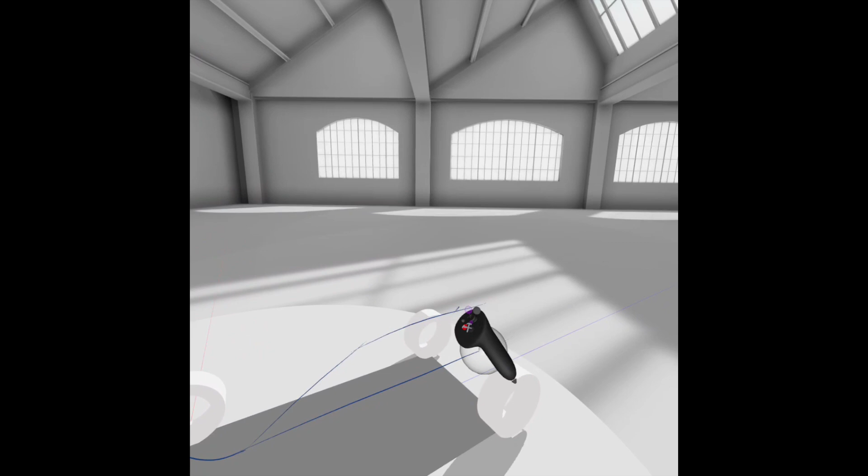I've been drawing on paper for years, and when I first got into this program, it took me about, I'll say, about 10 uses for me to really get the hang of it. We're talking on average 20 to 45 minutes a session, and I start getting the hang of it. See, I'm able to conjure up some lines fairly quickly.

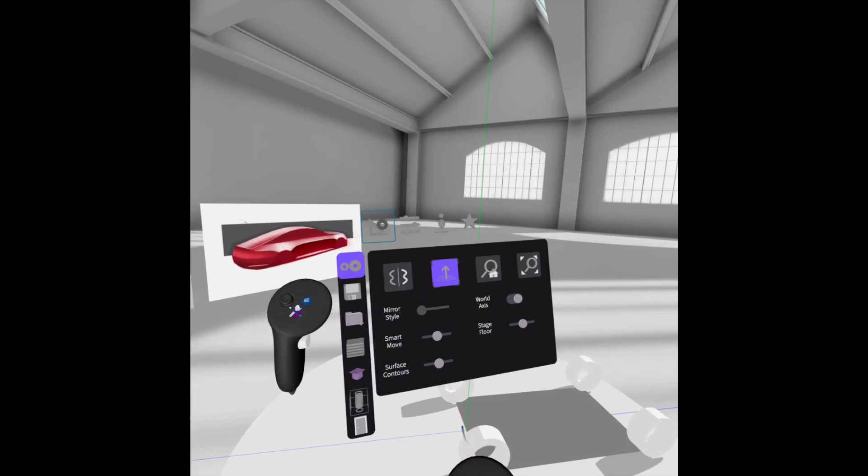So, what I'm going to do, we're going to get started with the sketching portion. You press on your left controller, press the blue menu button. It's going to come up with the settings, right? You want to make sure your mirror is on. You can choose your mirror style. Fixed is you can go beyond a mirror plane, but it'll still mirror on the other side.

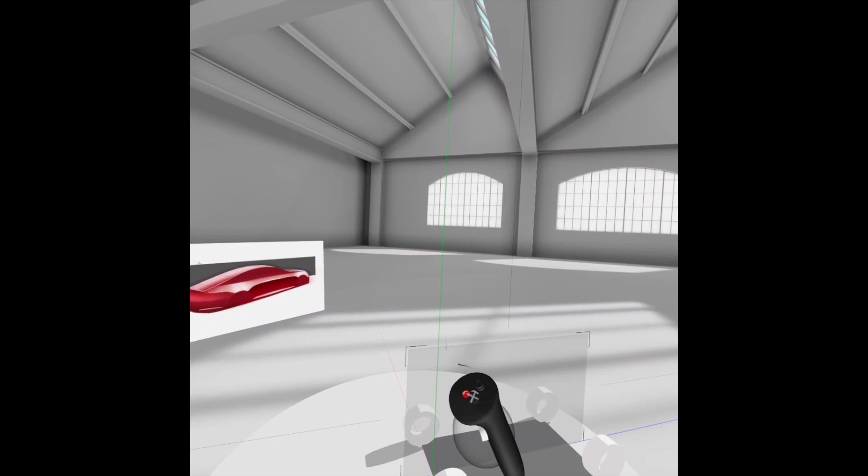With this one, it's auto scale. So however you draw the mirror, it's going to scale to wherever you're drawing your sketch lines, so it's up to you. It's a matter of preference. I'm going to turn it off because it's a little redundant. I know that the mirror is on because it's highlighted. So we'll get started with sketching out side view.

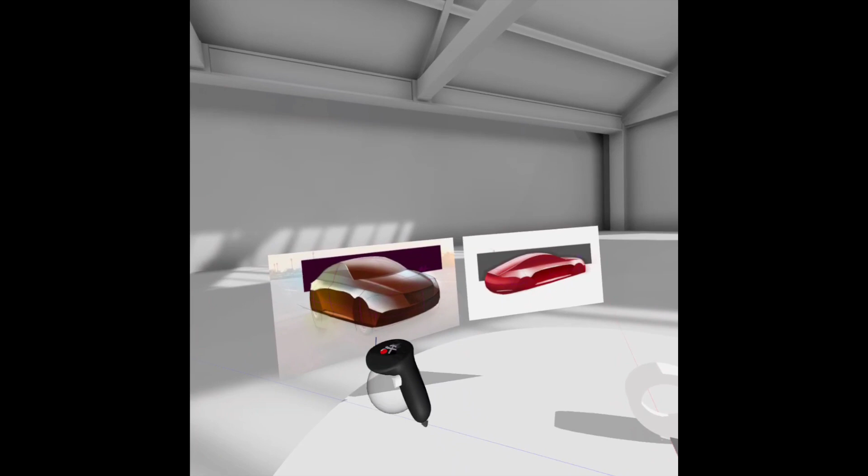Now, when I work in 3D, typically I have a side view, top view, front, rear, and a couple of drawings like this where I'm showing like the front 3/4, rear 3/4. With something like this, since it's a speed form, we can just rough everything in. We don't need plan views. We could just rough everything in, just sketch it all out. Especially since we have our chassis here, we can just sketch it all out.

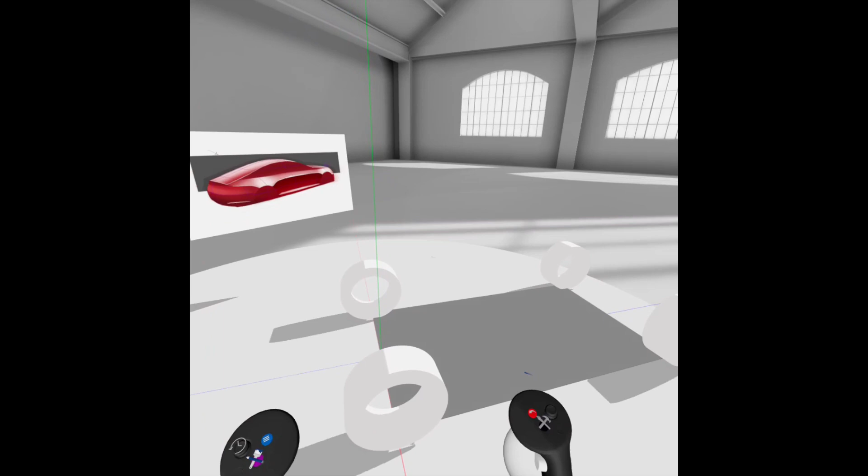Looking at the wheelbase, this will qualify for, say, four-door sedan proportions. So that's what we're going to do. All right, we'll get started. And the wheels are only here for scale and proportion sakes. So, let's see. Since it's a speed form, the actual wheels will not be included into the design itself.

So let's go to our layers and make sure that we're on a wireframe, which we are. The wireframe is going to help us set up our sub D when we start throwing in the sheet metal. So, moment. And all I'm doing, I'm just sketching with my trigger finger on the right controller, my index finger. I'm using that. You see a highlight. I'm sketching in our design space.

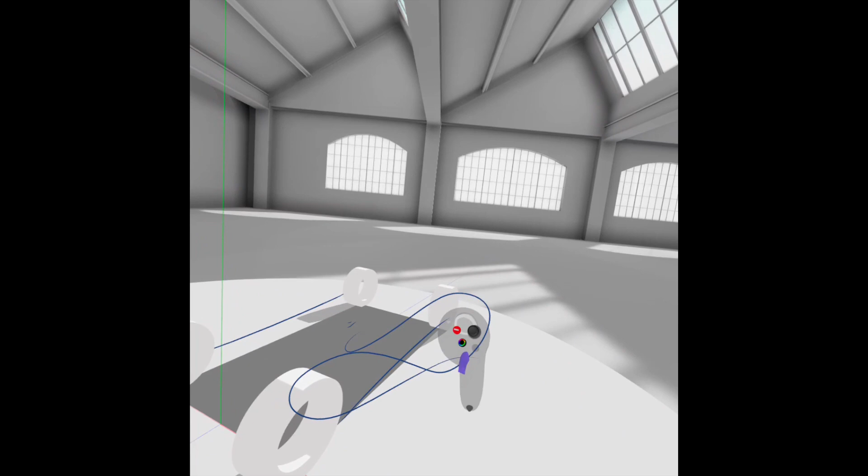And then I'm using my middle finger on its trigger. You see it's highlighted. Select the minus sign. And the minus sign only pops up when you highlight an entity, so you can delete them. And we'll keep going. I'm going to sketch this in according to the drawings I have up here. And just a reminder, these are the drawings that I did in Sketchbook Pro. So I'm just throwing some lines in.

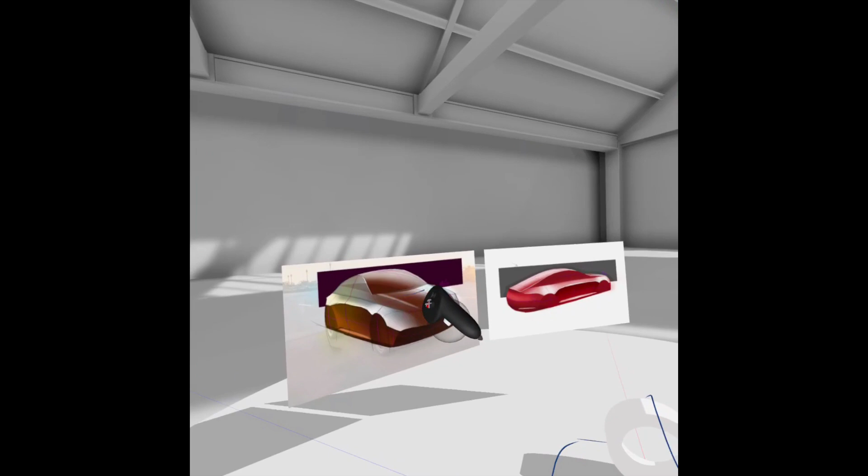Something like that. We know, looking at the design, that the windshield is going to sit behind the front wheels. So we're going to set that up. Let's see. And as far as drawing to perfection, you don't have to necessarily do it because I'll show you. There's a way to straighten up your lines and your arcs and everything after drawing everything out. So this, like I said, is just getting some things lined up.

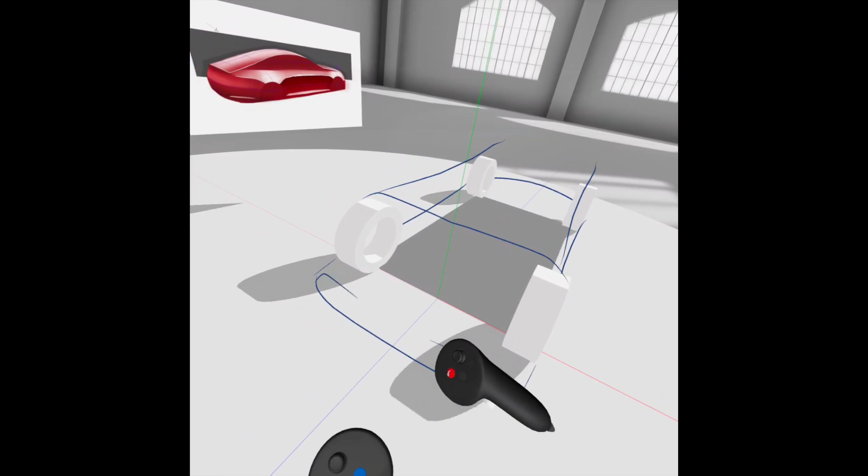Let's see. Okay, we know that is here. Okay, I'm gonna sketch everything out first, and then we'll be able to mess with the proportions with everything later. Be able to tighten everything up. Something like that. All right. It's just a placeholder for the grill.

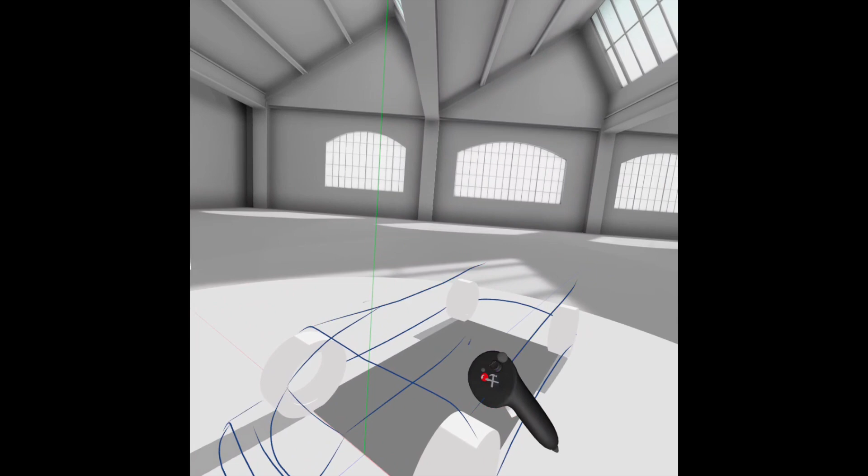Okay. This is the belt line. And then, let's see. This will be a windshield. Like I said, I'm just roughing everything in because we'll be able to straighten this out, make it look good eventually.

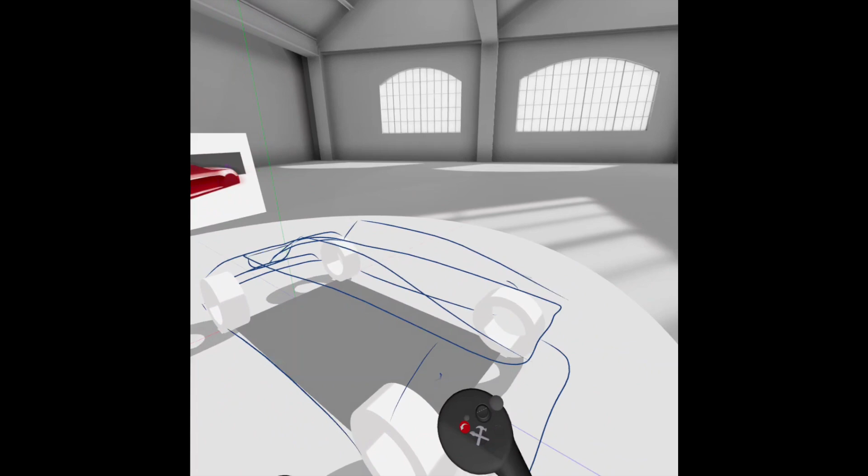Okay. All right. We got the greenhouse. Oh, let's throw in this light catcher down here. It's a light catcher. Gonna throw that in. Okay. All right. I think for the most part, we're good to go. It's a pretty basic design. It's nothing crazy.

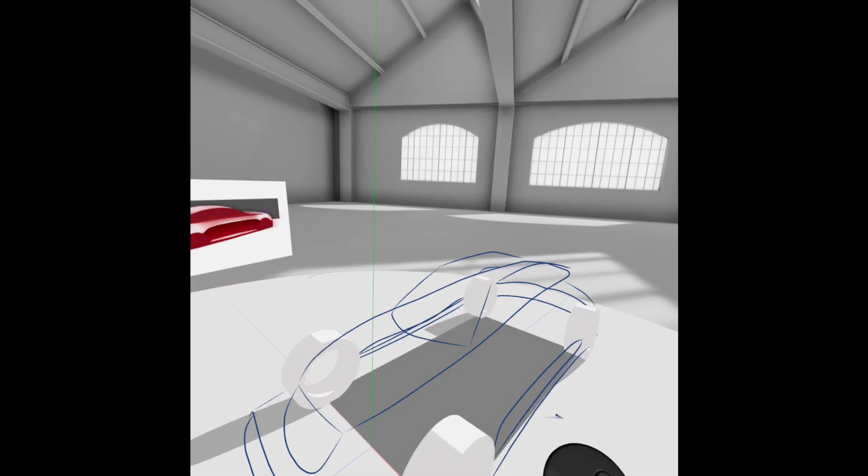As I've mentioned, the design is based on a Mercedes. It's the 2019 Mercedes CLS. So it's a four-door luxury sedan. Something you would compare to an S class. Well, I'm sorry, it's like a four-door sport back type of deal. That's why it has the backlight kind of flowing into the spoiler here.

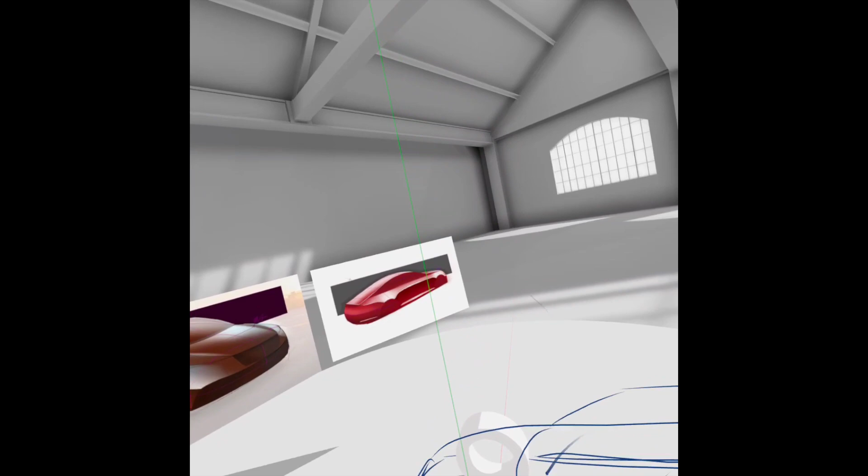So, the Audi A7 has the same thing going on for it as well. Some other notable sports sedans, large sports sedans. Let's see. Okay, so it's time to fix up these lines because, like I said, it's just roughing everything in for now. And it's a speed form, so it doesn't have to be super detailed.

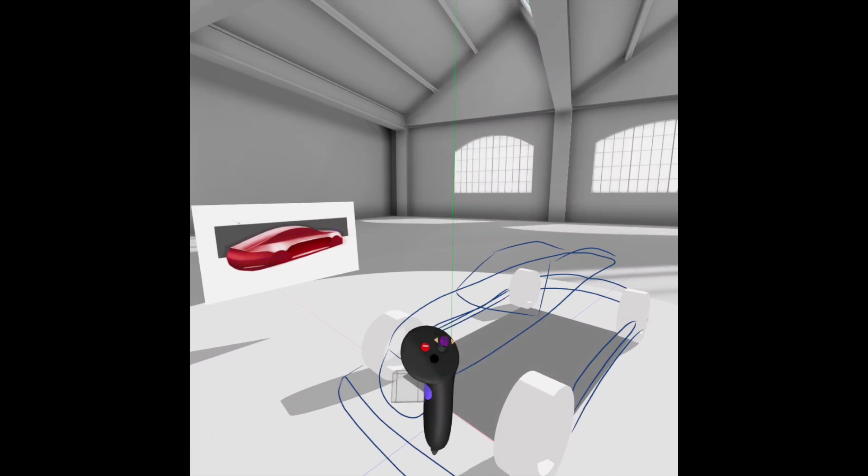What you want to do with your middle finger is, you see this little sphere, you can change the sphere too. If you hold down the trigger with your middle finger and click left and right, you'll be able to change it to a square or a cube or a sphere. We're gonna do a cube. I do prefer a cube.

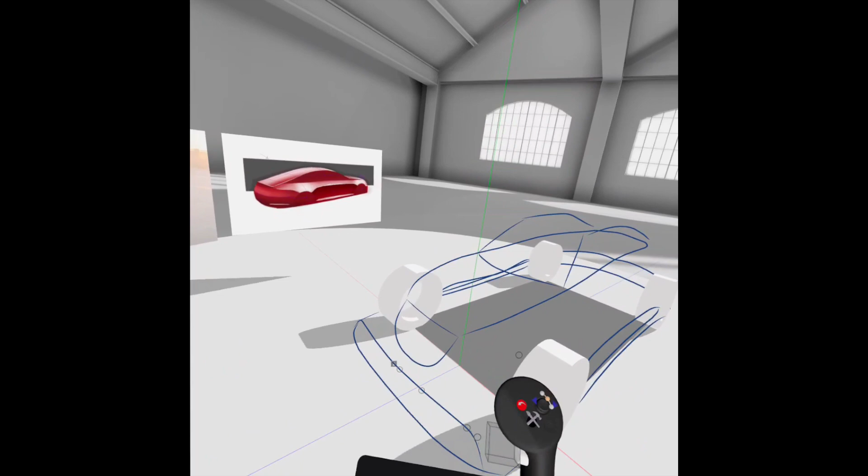So without pressing anything, hover your right controller over different line segments so you can see it highlight red. That's what you want. What you want to do is highlight the segment you want to tighten up or change, and then when you highlight it and you hold down your trigger, select on the left controller. Looks like line segments and vertices. If you select that, it's going to allow you to manipulate the line segments.

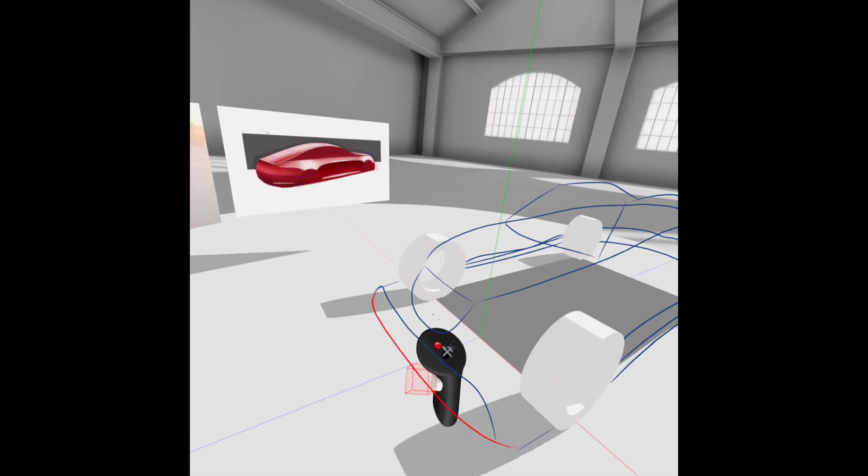You can add in vertices if you want, or you can take them out. So it's up to you. You could take them out, add them back in like that. What you want to do is make sure they're spread out evenly like that. Okay. So we're going to do this bottom line because this is going to set us up for the front end. And you just look to see what's going on up here and do accordingly.

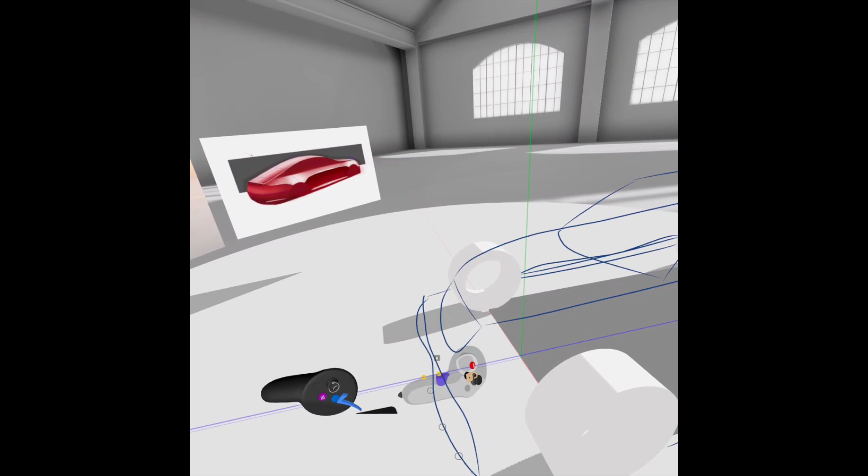Now you can manipulate each point or vertices in a specific axis too. You can free move it like this, or you can manipulate it in a specific axis. In this case, the way to do it, you want to line up your controllers like this, right? One on top of the other one in the direction you want to manipulate it. So we're going to move this left to right like that along center line.

Okay. We're going to do the same thing here. Okay. And press the little check, and then you want to do the same thing here. You see a little check mark; after you get done manipulating your lines, then you can hit the check mark on a controller. It'll lock it in. You want to do the same thing here. Okay. All right, we're going to move this grill. We're going to do the same thing. Okay.

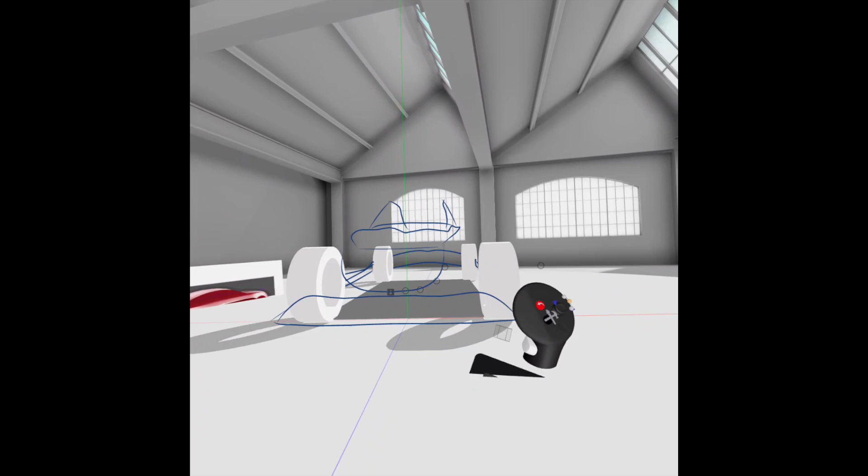All right, and then we're going to go to the front view, do the same thing. I'll fix this up a bit. Go move that out. Give it some character. It's a little boring. Okay, we're going to do the same thing here. The wireframe is going to allow us to lay the sheet metal where we want. So that's why we're doing a wireframe right now. There we go. Okay, not bad. All right, not bad, not bad. We'll make some adjustments here.

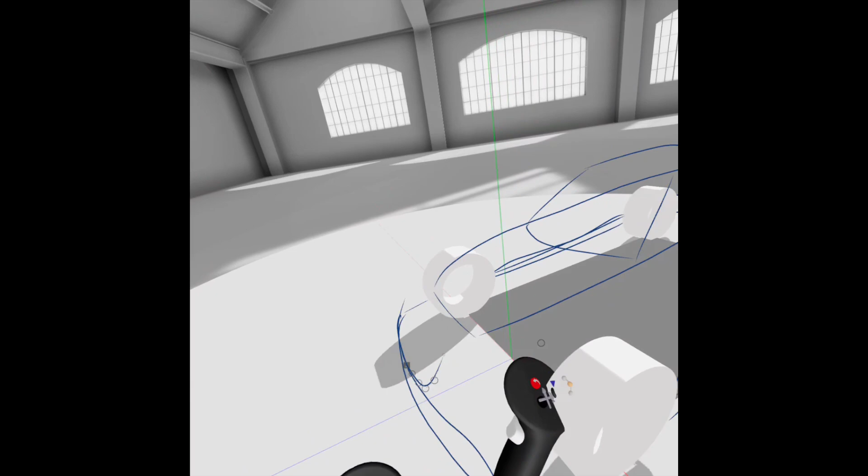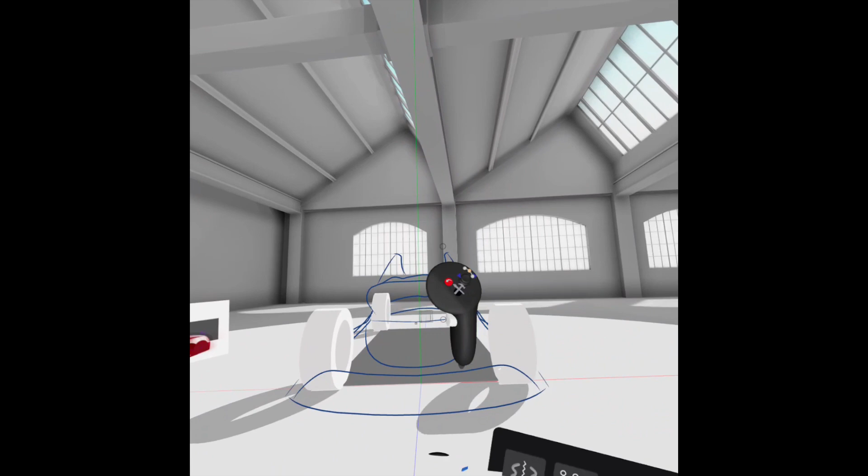The cool thing about working with a mirror plane right at center line, you can look at how the lines behave on the other side of the mirror, and that gives you some clue as to how everything is going to line up when you start laying down the sheet metal for the vehicle. You see on the other side how it looks, and you see where everything falls into place. And then same thing here. Like that. Give it some crown. There we go. Want to make sure it's doing that. Yeah, okay. All right. Same thing here.

So here's another trick. When you're doing a drawing like this, you got options, but let me go ahead and click out of this. We're going to go into our menu, and we're going to go into the settings. I keep the vertical lock on because if you don't, then you'll be able to do like this, with the middle finger trigger on your left controller.

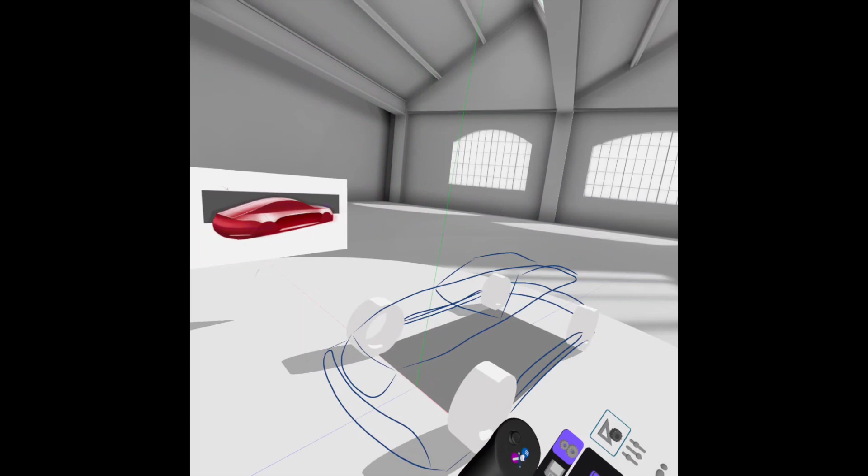This is cool and all, but honestly, for what we're doing, we're just doing a simple speed form. I like to keep it in vertical lock, so we don't have to worry about the model being all over the place. So when I go to press this trigger, wherever I move, I could just do it effortlessly in its design space. I'd rather just keep it like that. That's how I design. When you start using the program more often, you figure out what's best for you. So we're gonna go back here, start manipulating some lines.

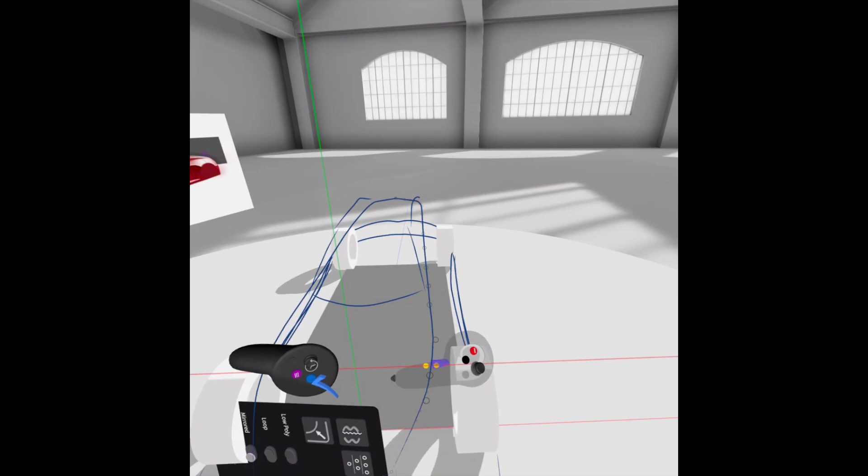I'm moving the belt line out because realistically, the belt line is not that close to center line. You still need room for occupants, even though this is a speed form. You want this to still look like a vehicle because that's what it is. This is based on a luxury sedan, so you want the proportions to make sense. And then you go into your side view and do the same thing. You try to space everything out evenly.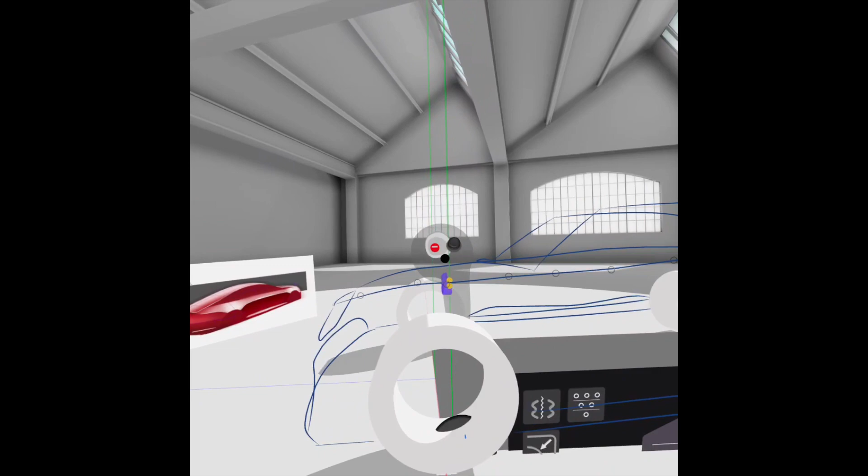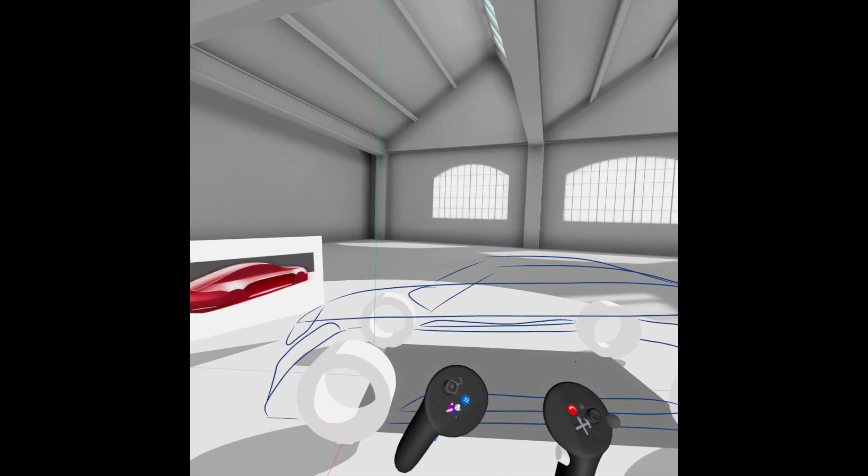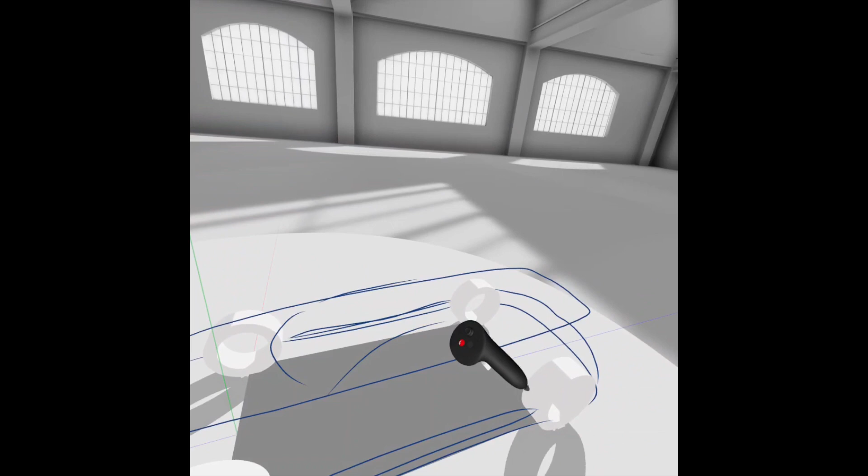So you can understand why I'm designing like this. Yeah, it just makes sense. And it helps keep things simple too. All right, here we go. Not bad. All right, then we're going to manipulate this line segment here. Let's see. Okay. I'm going to do this in one. Let's see. Okay.

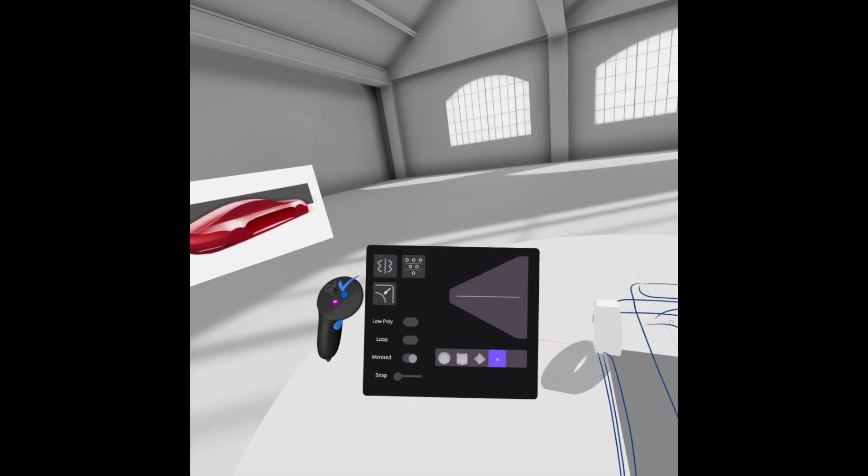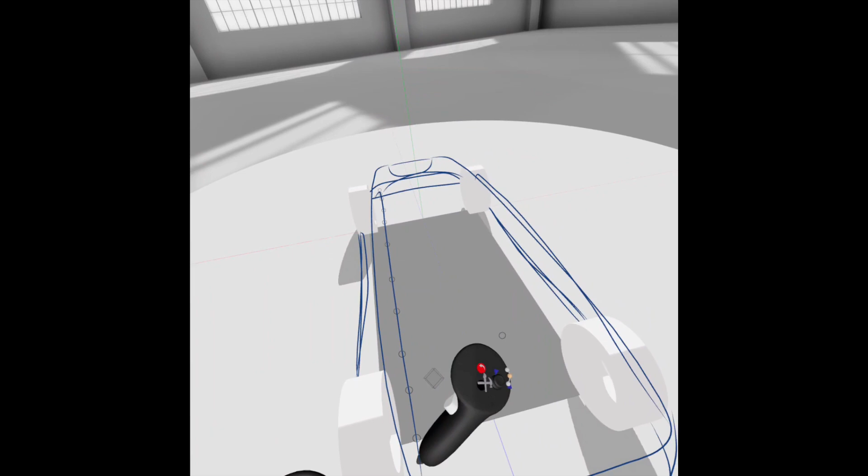So right now we're working on a greenhouse. Now, once you know some of the principles when it comes to car design, like let's say, for example, with the greenhouse, if you're looking at it from the top view, you know that you'll be able to see a bit of the side windows, right? That's the tumblehome. You'll be able to see some of the side from the top view. So naturally, let's see. We're gonna give it some more oomph. Okay, it's a little drastic, so do it like that. Go.

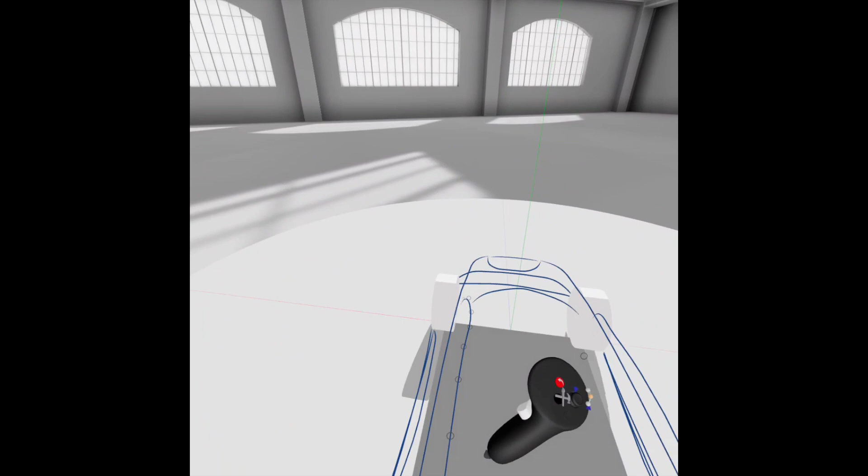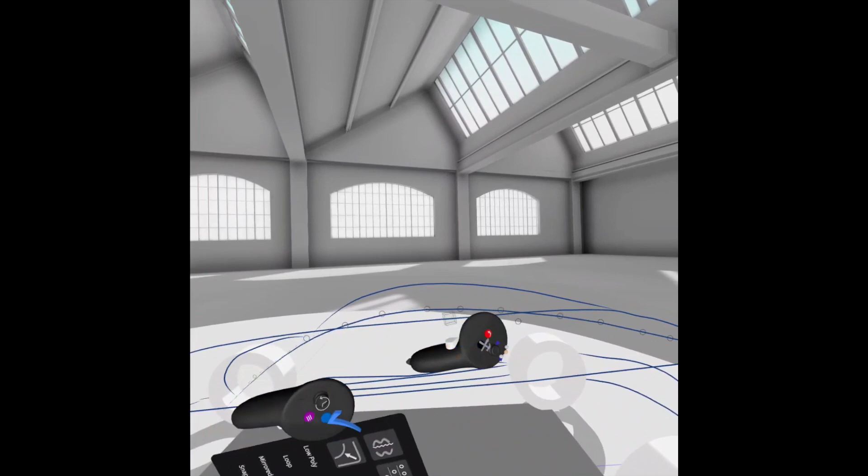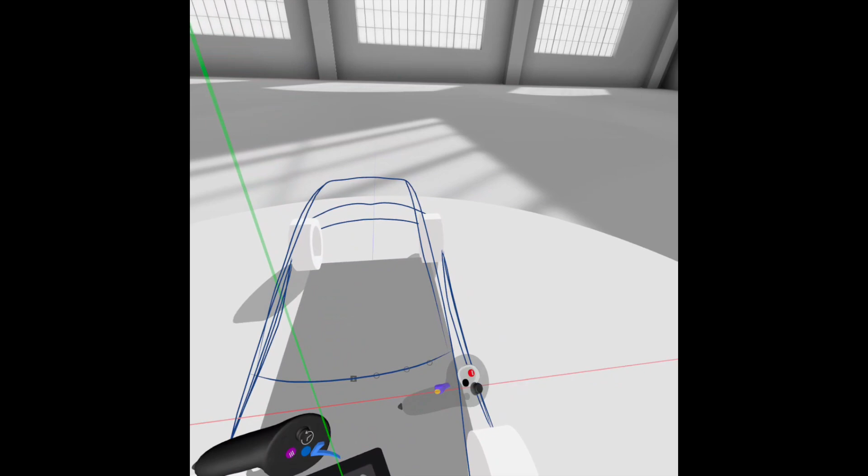Okay. I'll straighten this out a little bit. It's not bad. Like I said, it's just to get the point across. Let's see. So we're gonna fix this up here. Kind of rake it back a little bit. Okay. All right. And then this is going to be the windshield. Okay. That's not bad. Spread this out a little bit. Okay. It's going to have a little bit of crown in it. That's what we want. There we go.

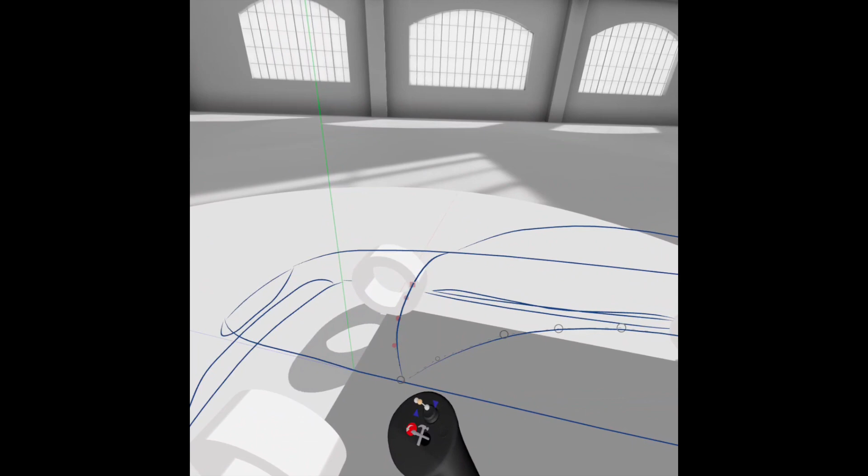Okay. Now, what I'm going to do is start connecting points. So we have the snap function. All I did was, as I showed earlier, highlighted a segment and select edit. And then it brings up this menu here. And for the snap, we're going to snap to other points. So you see when you start highlighting your segments, you'll be able to snap. So you see how I was able to snap to this segment here. And then I should be able to do the same thing here. There you go. Okay. Now I'm going to turn it off and we'll be able to line everything else up accordingly to our snap points.

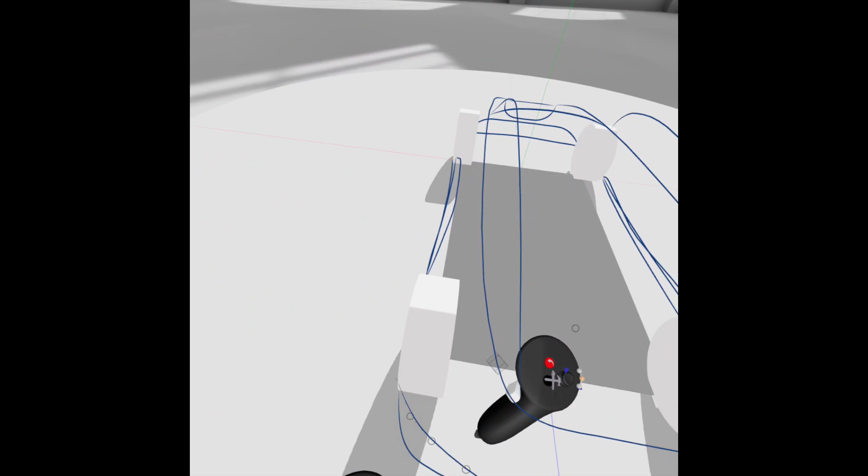So we can start straightening up our lines now. Okay. All right. We're good to go. Oh, let's straighten this up. This needs a lot of work back here. So we're going to pull this out. We're going to even this up a bit. We want to spread out our CVs or our vertices. Let's see. Like, go. Right about there. Okay.

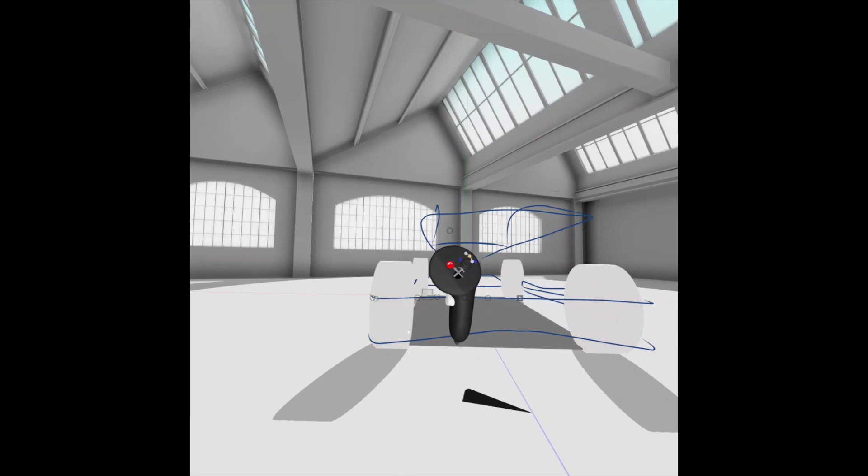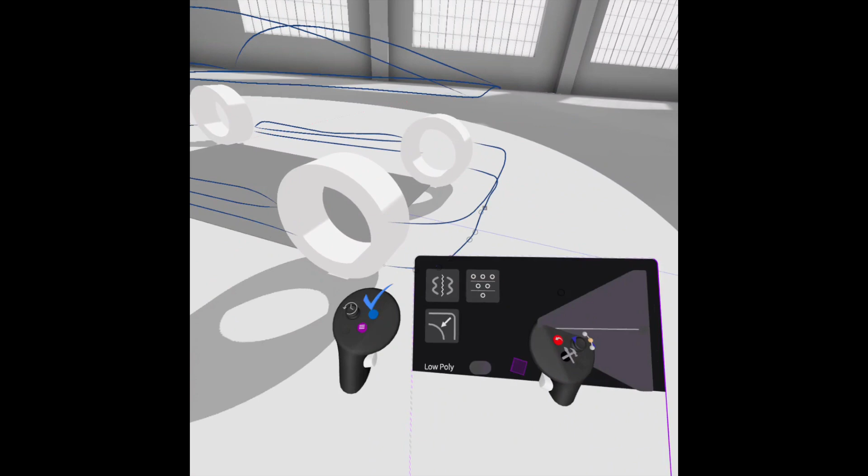It's also the reason why I'm such a fan of working in mirror mode, because you don't have to balance everything over manually. It does it for you. There we go. All right, not bad. Then we're going to do the same thing to this line segment here. There we go. We're going to turn off the snap. We don't really need it. Okay. All right, so it looks like we have this worked out for the most part. Let's see. I'll lower it.

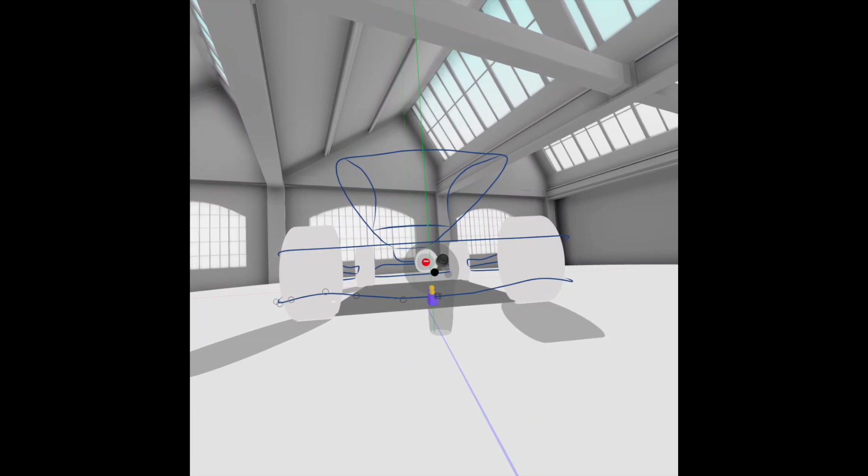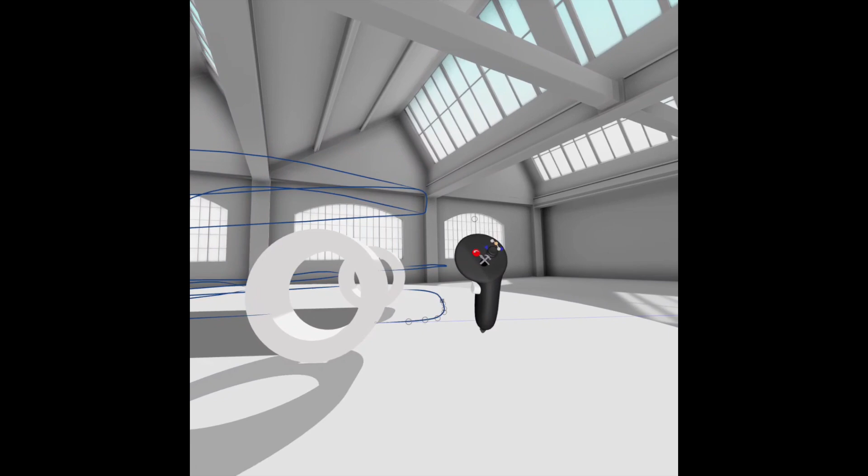And you can see where when I go to manipulate the line segments, if I'm holding my controllers like this and I go to select the vertices, you can see it highlight that it's going to move in that direction, in this case, up and down. That's going to help keep everything straight for line manipulation. You see me looking at it from this view. So just checking everything out. It's a pretty simple design. It's nothing crazy. And then, okay, good. Here, let's straighten up this line. I'm not a fan. Okay. Yeah, it's all wiggly right here. Go.

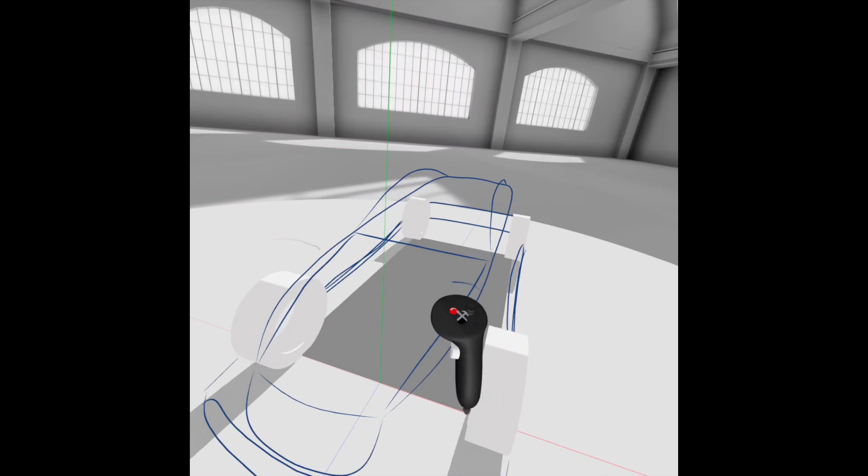All right. Now there's a crease in the hood here. We want that to be there too. So I'm gonna just go ahead and draw it in right quick. Okay. I'm gonna manipulate it. Try to spread the points out a bit.

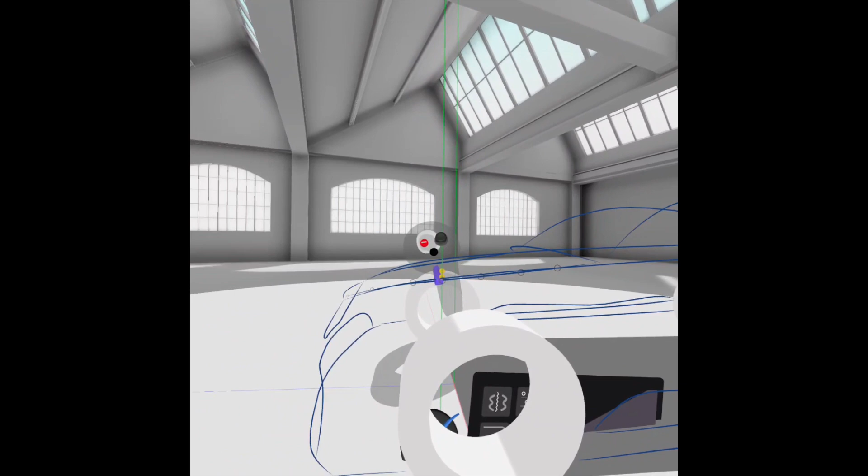Okay. And then now, if you look at this design, the way I did it, this crease falls below this line here to where it goes into the A pillar. So what we want to do is go into our side view and make sure that it falls below just a bit, just enough. There we go. Because when we go to lay out our sheet metal, we want it to demonstrate that it's kind of falling below this surface here. Okay. Same thing. Kind of tighten it up a bit. There we go. Not bad, not bad. Yep. It's not perfect, but you get the point. Okay. Very good. All right. So we got that worked out.

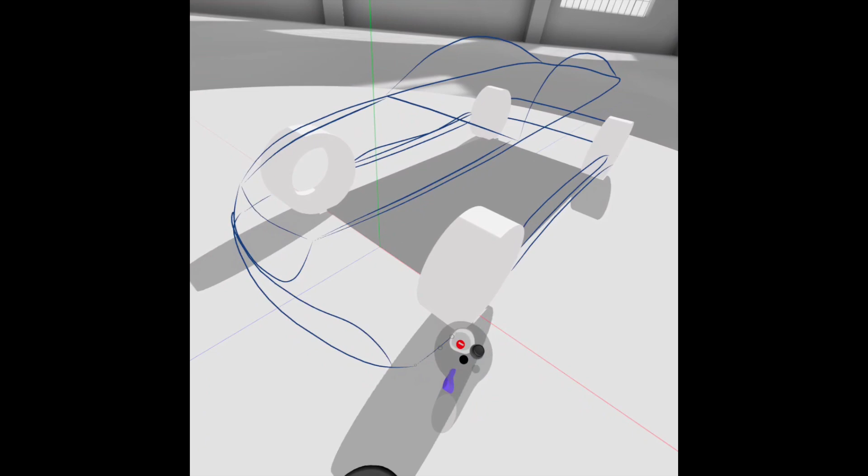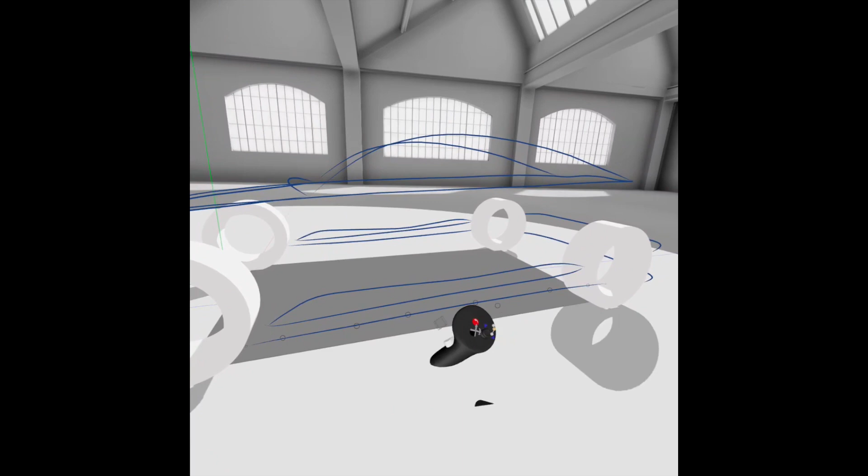Oh, let's do this too. All right. We want to snap to our points. There we go. Yep, that looks about right. Yeah, that looks good for the most part. Yep. All right, it's good to go. Okay, let's see. This area is a little tricky, but we're going to resolve it fairly soon. So let's get these lines straightened out too, so everything is nice and neat. It doesn't have to be perfect. Here, we're going to delete that line. There we go.

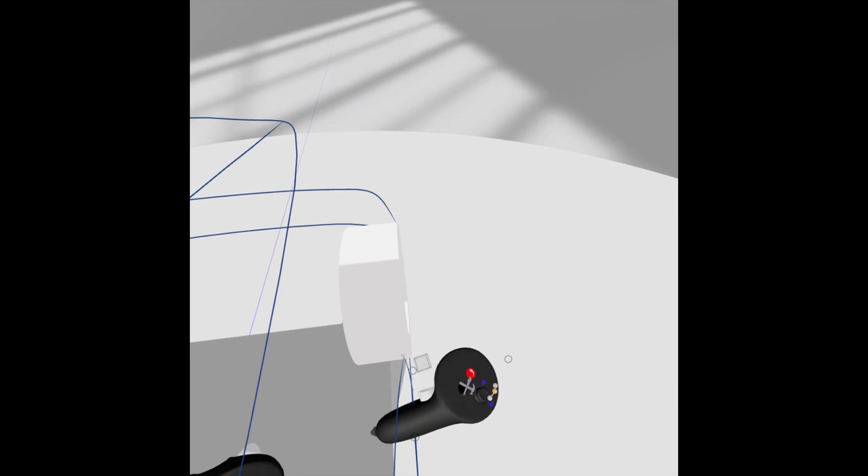All the work is going to come with the sheet metal, when we throw in our theoretical intersections and all that. Yeah. And make sure it's straight. There we go. Okay. Now we're going to flatten this out.

Okay, not bad. I think this will work. Yeah, that'll work. And then this will be our light catcher.

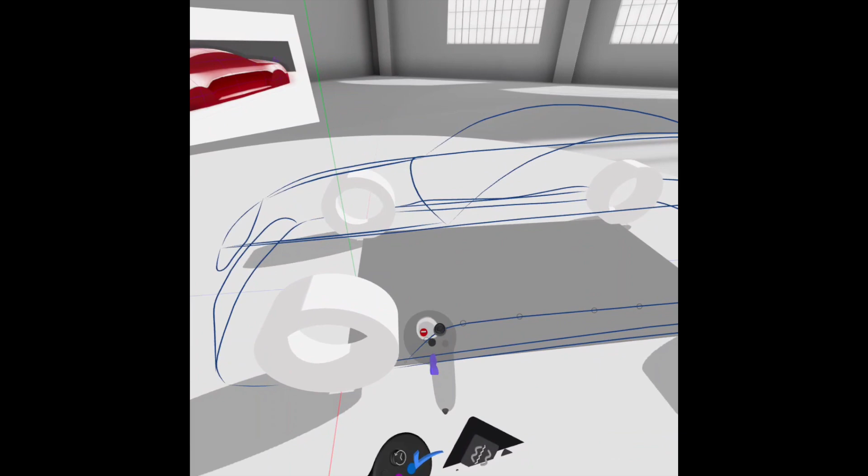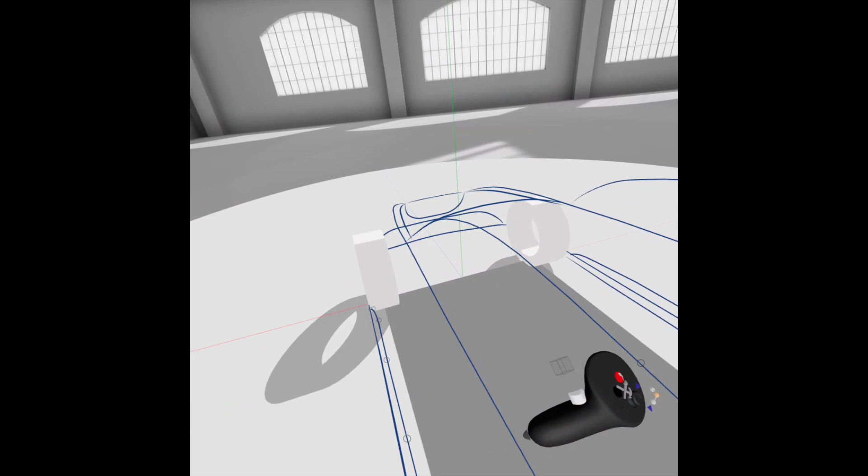Now, we don't want the light catcher to be too far into the body, because although this is a speed form, like I said previously, it's still a car. At the end of the day, we want this to be a bit realistic, with occupants sitting inside. Because of that, the light catcher can't go too far into the sheet metal, since you still have to account for occupant seating and things like that. Depending on how far inboard the occupants are, you can get away with some crazy stuff with the sheet metal, but generally you want to keep in mind there are people going to be sitting inside.

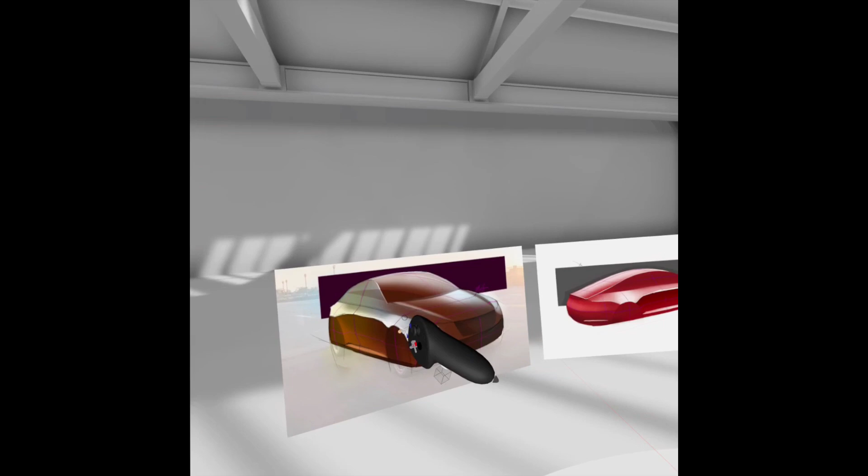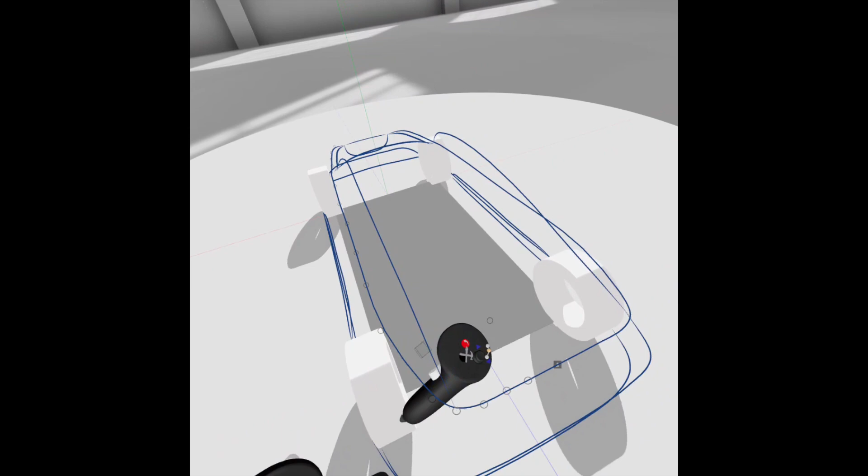With that being said, we're going to move the belt line out a bit too. We'll move that out a little bit. According to this, this will be where the wheel flat is, and then you have this transition that goes up and kind of goes over. Let me bring this out a bit. There we go, I'm just bringing out the greenhouse a bit here.

Okay, then we're going to do the same thing here. Not bad, tighten this up a little bit. There we go.

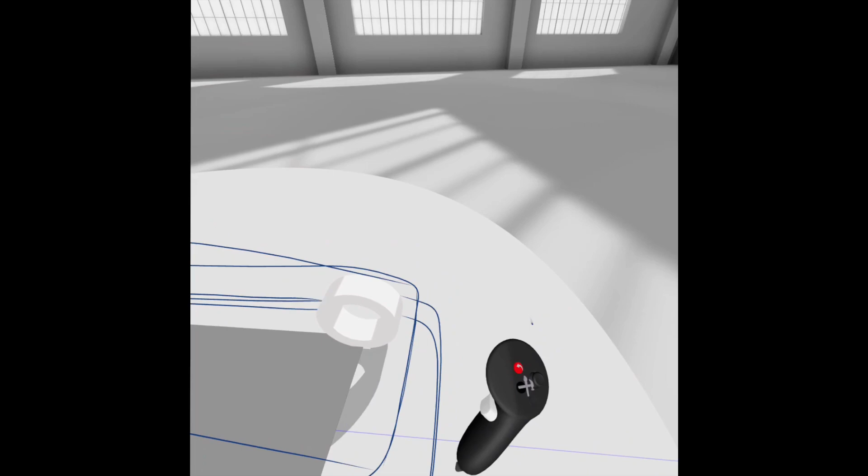Okay, all right, I think it's good to go. I think it's ready for sheet metal. We can always go back and make our changes and stuff.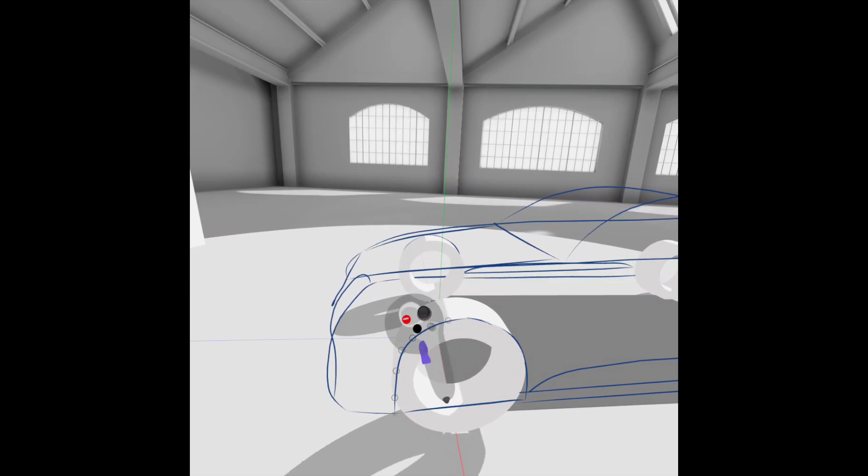Let's do our wheel flats, because technically with this speed form there aren't going to be any wheels, so we can cover this up, something like that. We're going to snap, there we go. I think that'll work. Same thing.

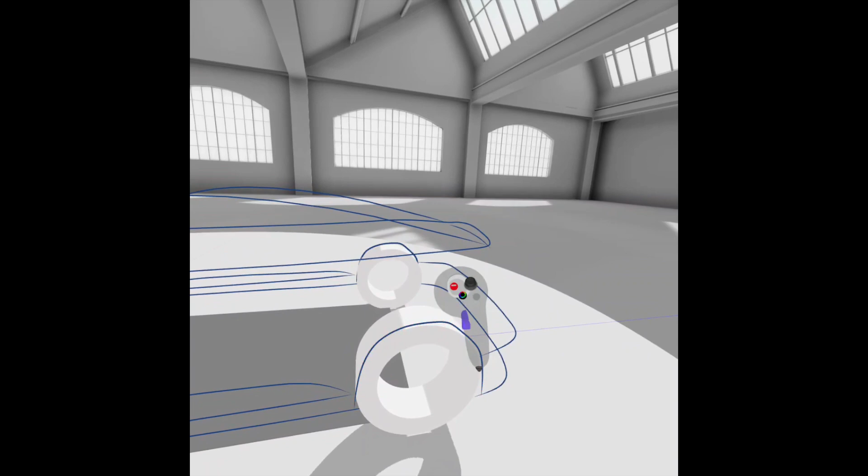All right, we're going to do the same thing back here. I'm going to try doing one segment. There we go. I'm just using the snap tool, the point snap to other objects and splines. So that's all I'm doing here, using my controller's middle finger trigger to snap these points onto this tire.

All right, think we're good to go. It's pretty much what we want. Okay, not bad. I think we can make this grill a little bit bigger.

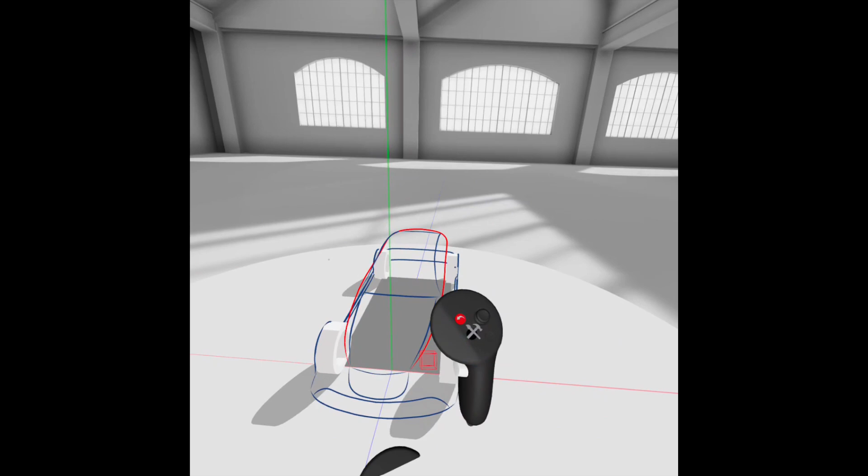So in order to do that, let's turn off the snap. I'm gonna move some of these lines out a bit, probably like there. And then I'm gonna manipulate this, kind of go out a bit.

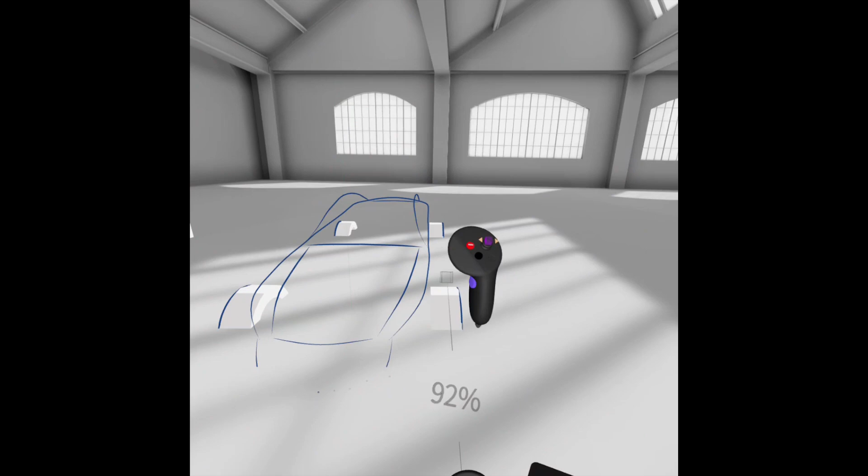All right, so to increase or decrease, or scale up or scale down the vehicle itself, you just hold this trigger, you see it highlighted. You hold the trigger, pull apart, push together, that's all you do. Scale up like that, so you get a sense of how big this car is, and you can see things a little bit better too.

Okay, good, we want to stretch this one out here. All right, not bad. There we go, okay, that's what we want. Then we're going to move this in.

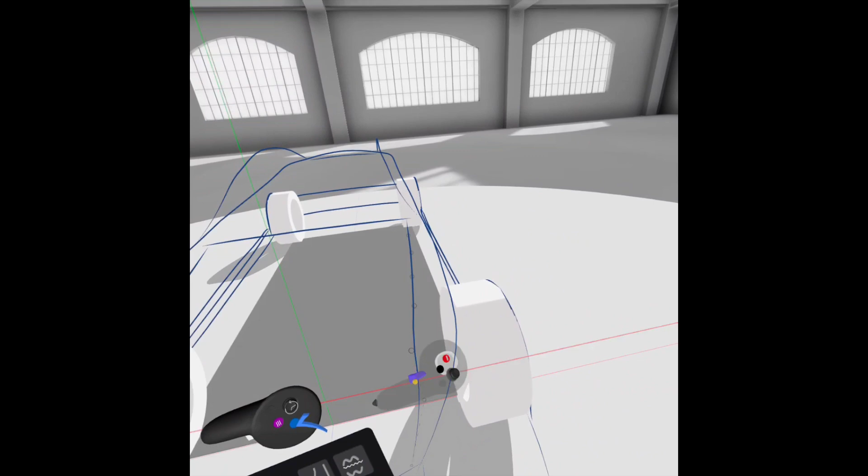This is that crease in the hood that falls below the belt line. It's a simple aesthetic added to the hood or the bonnet, depending on where you are. It adds a little bit of character to the hood, and you'll see what I mean once we start laying the sheet metal down.

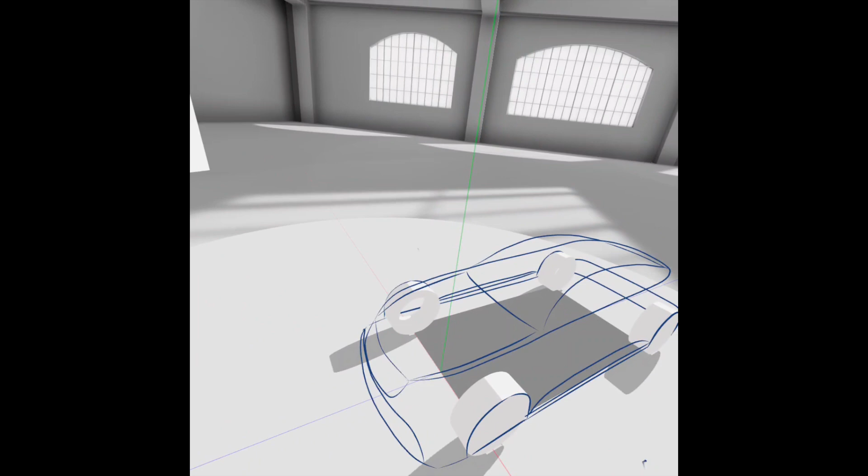Okay, all right, that's pretty good, that's what we want. Let me tighten this up a little bit down here too. Then we want to tighten this up.

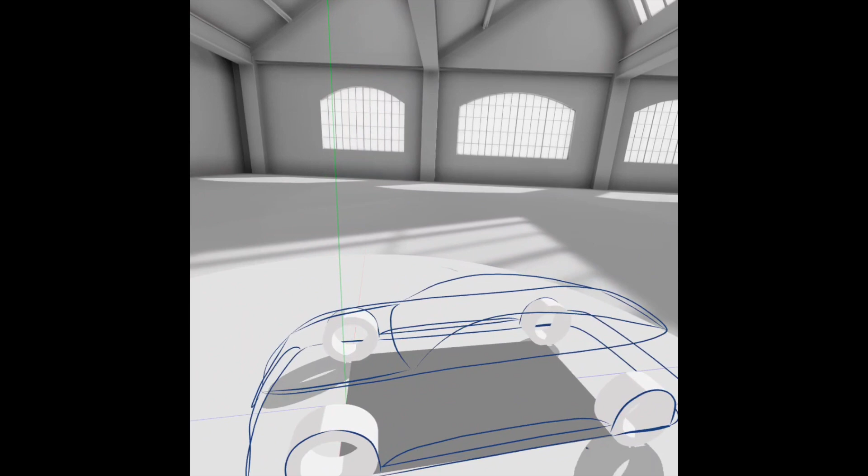All right, I think we're good to go. All right, so we can start laying down some sheet metal. This is the wireframe for our vehicle. All right, yep, I think we're good to go. Okay, very good.

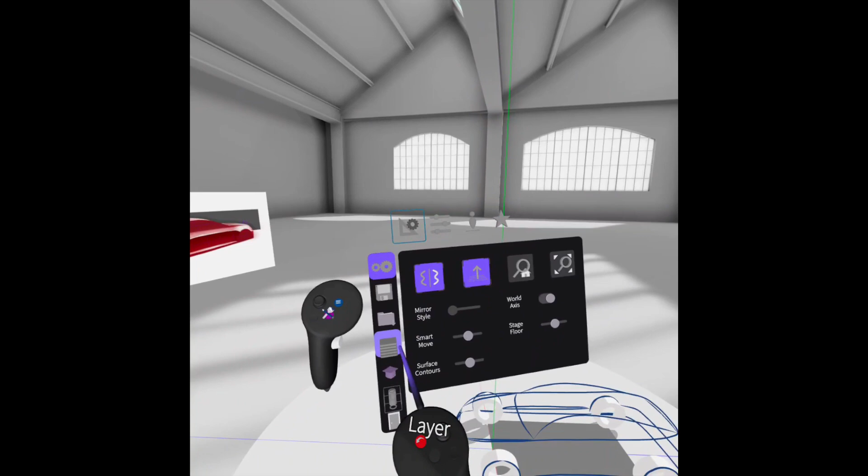Now, what we're going to do is eliminate the chassis, the prefab chassis. We're just going to make the layer invisible. There it is. All right, so now we just have a wireframe that is visible and we're able to manipulate. So in this next part, we're going to start laying down the sheet metal, and I'm going to show you all how to do that.

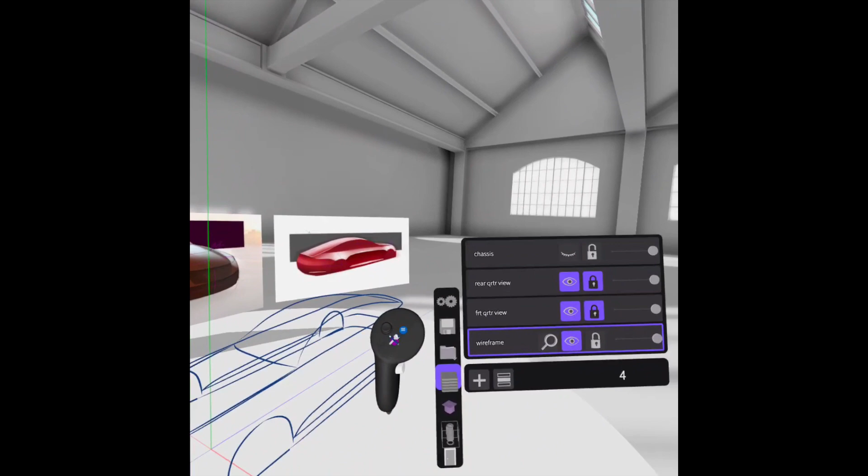Here, let's take some pictures. So press the blue menu button on your left controller, go up to save and export. Of course you want to save it, but there's an option to take screenshots, you'll see a little camera pop up. But I'm going to save this first. I'm saving it to my landing pad so I'll be able to access it from wherever. Then I'm gonna save it to device, we'll just say yes. Okay, I'm gonna switch it back to landing pad.

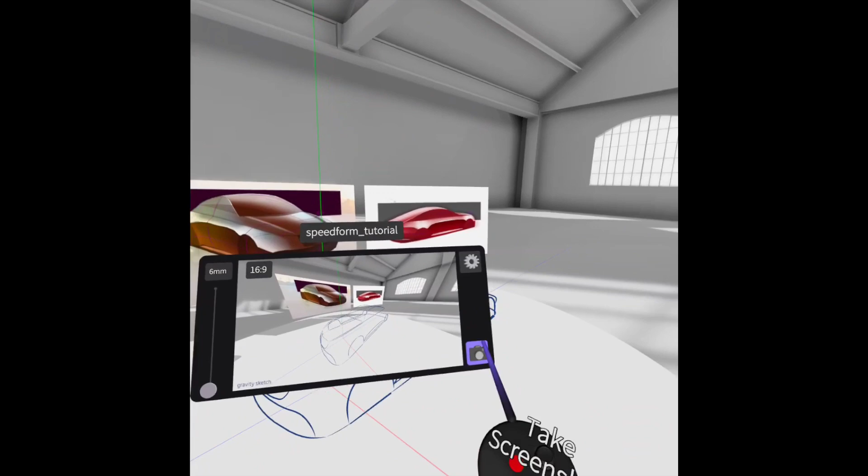Now let's go ahead and take some screenshots. So we have here the drawing, see my drawings in the background and a wireframe. You just select the little camera and it's going to take the shot. There it is. And then we'll do the same thing here, like that. All right, we're good to go.

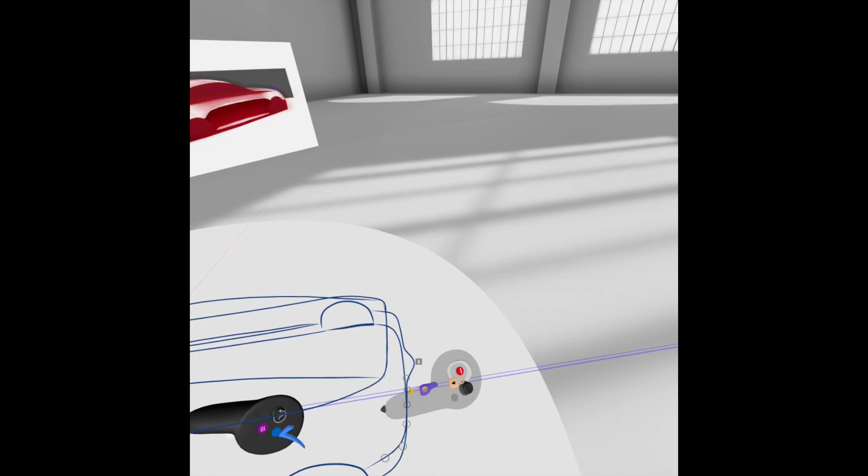Now, looking at the proportions, what I'm going to do is stretch out this rear end a little bit, because it doesn't quite look like this. So I'm going to stretch this out just a little bit, take it to the rear, and do the same thing down here.

All right, I think we're good. So next part, we're going to lay down some sheet metal.